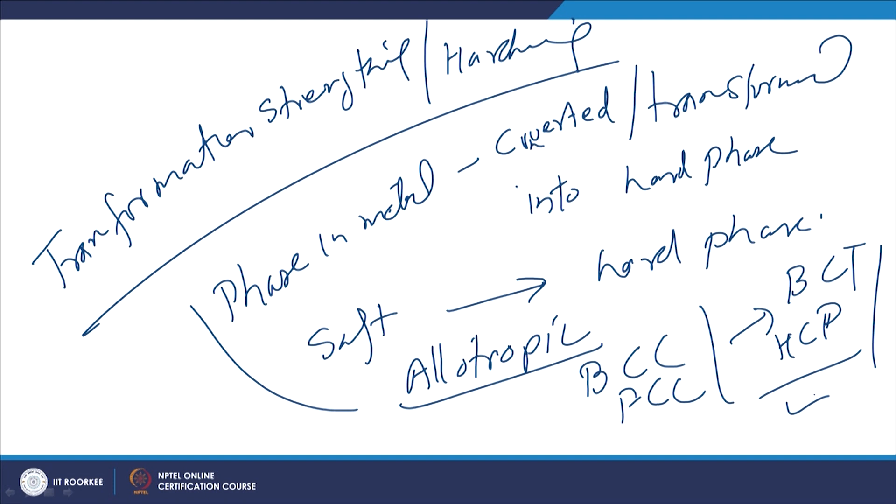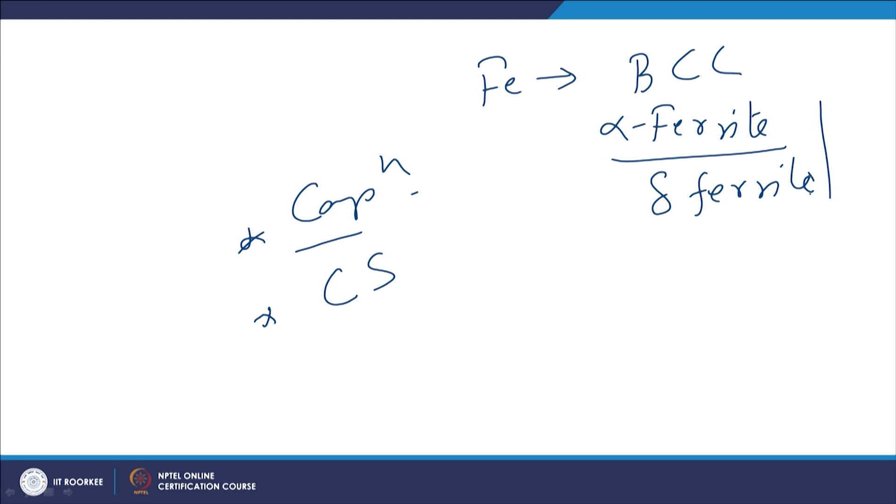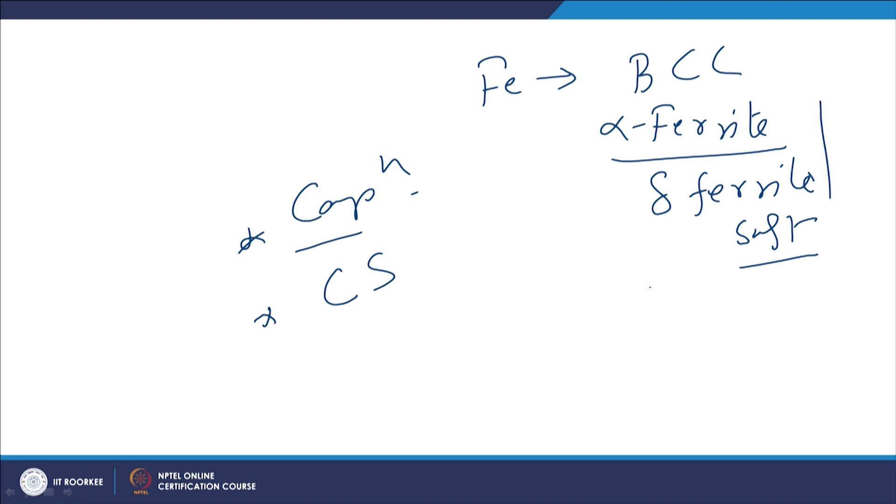So, as far as the phases are concerned, like either there is a minor change in composition or just change in the crystal structure, like iron may be present in form of the BCC structure like the alpha ferrite, or it may be in delta ferrite. So, this is alpha ferrite and the delta ferrite, both are comparatively soft. But when it is heated to the high temperature or when controlled alloying is done, iron can also be obtained in form of the FCC crystal structure, which offers altogether different type of the mechanical properties.

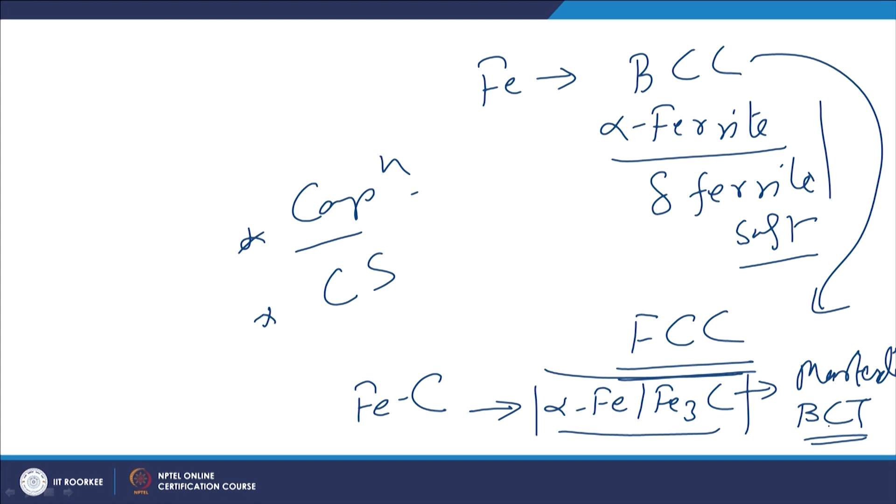Similarly, for a given composition of the iron with the carbon, we may have the alpha ferrite or iron carbide, and when such kind of the mixture is subjected in very controlled way to the phase transformation, we may get the martensite, which is comparatively harder and brittle. So, this will be having altogether different kind of the crystal structure like BCT structure. So, likewise like the iron, the cobalt and the titanium alloys also show such kind of the transformation behavior, with either change in the thermal history of the material or the mechanical history of the material during the processing.

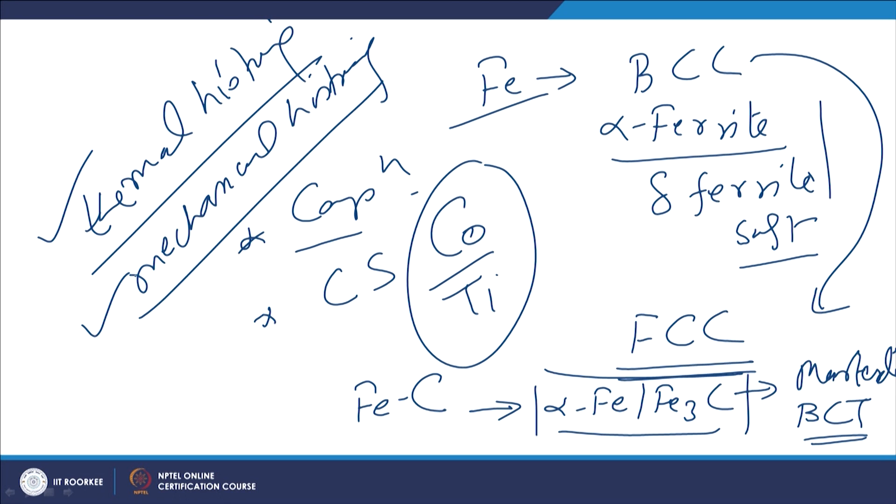So, either the controlled heating followed by cooling or the controlled plastic deformation of the metal leads to such kind of the phase transformations, where change of the phase leads to the increase in mechanical properties or decrease in mechanical properties. So, in which way the transformation hardening metals will be behaving during the welding?

We know that the welding broadly we can group under the two categories, where the fusion is realized through the application of the external heat, or very controlled plastic deformation is realized at the faying surfaces through the use of the external force. So, in both the cases responses will be different, and in that case, the plastic deformation may lead to the deformation assisted phase transformation, while in case of the fusion welding it is the heating followed by the rapid cooling that leads to the development of the variety of the phases.

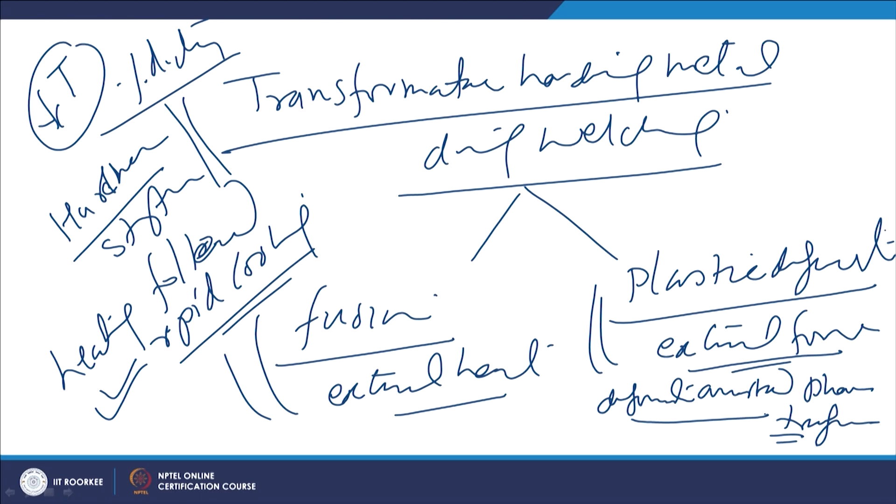These transformations and so the related mechanical property variation may be favorable, may be unfavorable. So, if it is favorable from the performance point of view, we will say that the weldability is good, and otherwise it is poor. So, now let us see the way by which we can understand the weld thermal cycle and its effect on the weld joint characteristics of the transformation hardening materials.

Transformation hardening metals. So, due to the weld thermal cycle experienced by the weld metal and the heat affected zone, there can be softening or hardening as per the condition of the metal which is being welded, which means, for example, if the steel is being welded in quenched and tempered condition, then after the fusion welding due to the weld thermal cycle in the heat affected zone, Q&T steel is over tempered and this leads to the softening, while in most of the cases due to the weld thermal cycle, higher cooling rate associated with the HAZ and the weld metal causes the hardening of the metal.

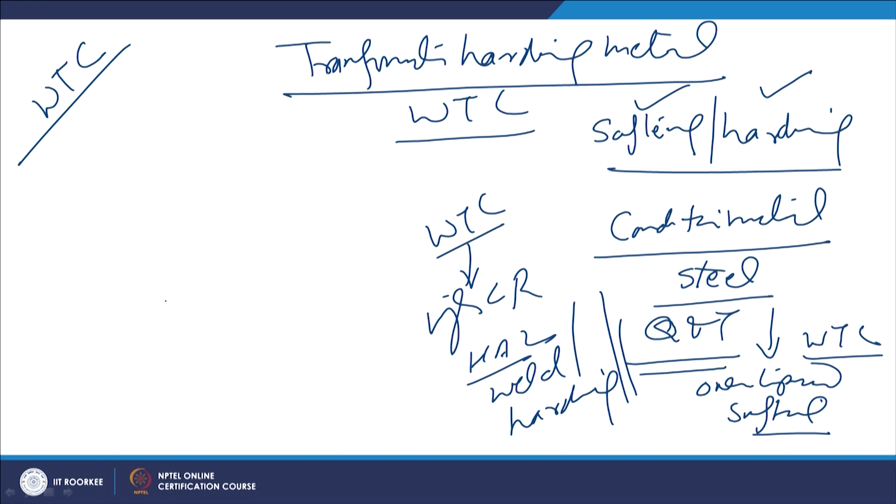So, as far as the transformation hardening metals are concerned, due to the weld thermal cycle, these can experience both hardening or softening, which will depend upon the condition, basically heat treatment condition of the metal in which the welding is being performed.

Now, we will try to see very closely the way by which the welding will be affecting the characteristics of the transformation hardening material. Say in x axis we have the time and in the y axis we have the temperature. So, if we try to understand the way by which weld thermal cycle shows the variation in temperature as a function of time, this is WTC, weld thermal cycle, very rapid increase in the temperature followed by the fast

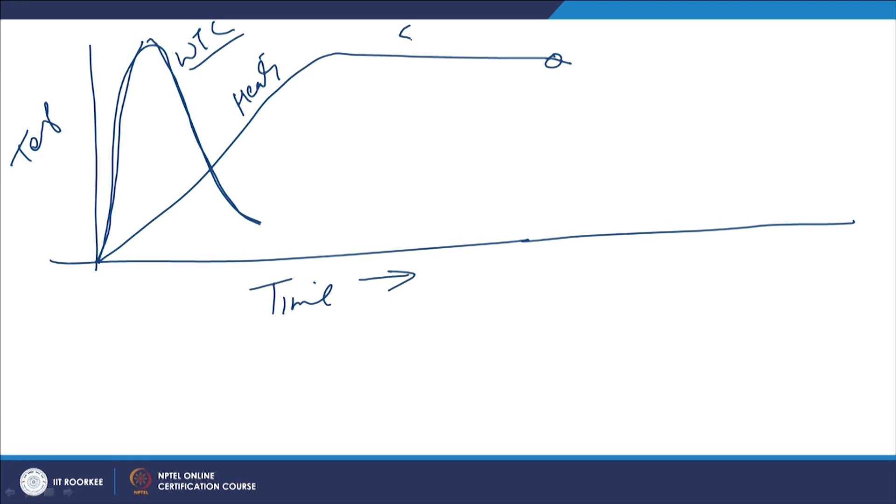cooling. So, on the other hand, if we compare it with the heat treatment, rise in temperature is slow, then holding is for longer time followed by the cooling, because what heat treatment involves? Heating then soaking, and followed by the cooling at different rates as per the requirement of the properties and phase transformation like this. So, like annealing, normalizing, air hardening or quenching.

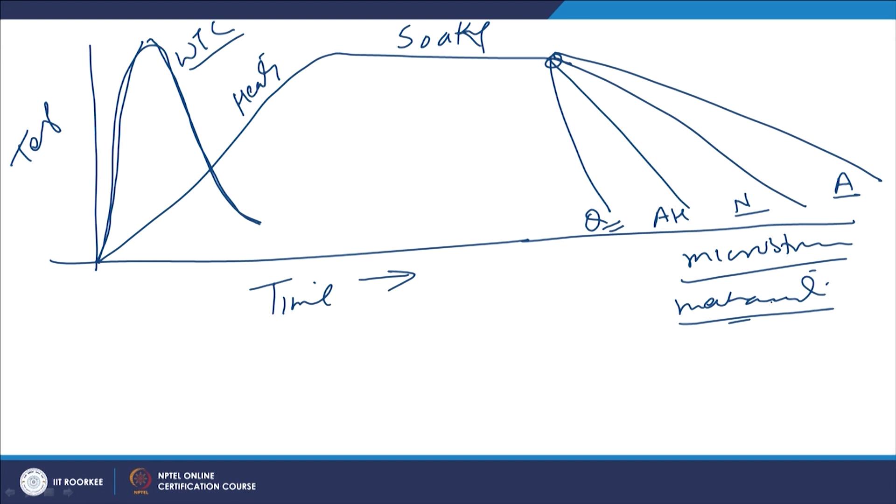So, the different cooling rates will be leading to the varying or changing microstructures and which will be leading to the different mechanical properties. This is what is typically used in case of the steel for changing or realizing the different set of the mechanical properties.

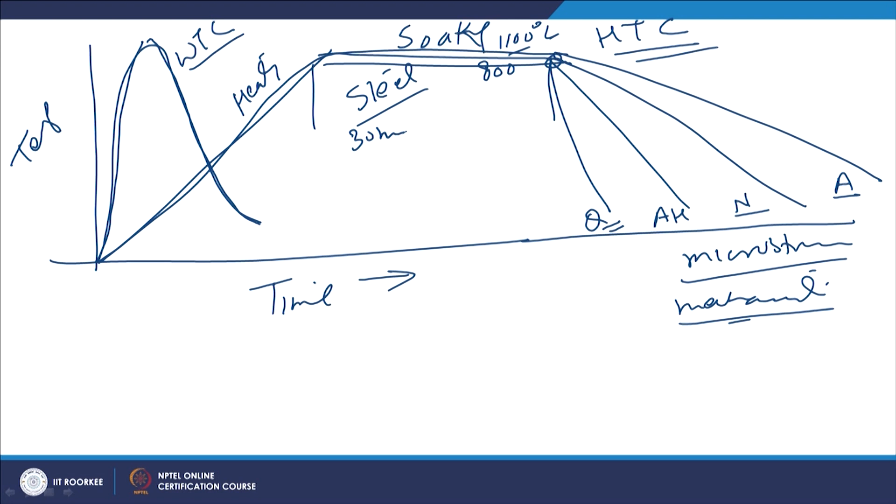So, if we compare the weld thermal cycle with the typical heat treatment cycle, then heat treatment cycle is very long, where it takes very long to heat to the required temperature, which is normally say in the range of 800 to 1100 degrees centigrade, and then followed by the soaking for longer period, which may vary as per the section size from say 30 minutes to 2 to 3 hours as per the case, and then different cooling

rates, like cooling rate varying from 2 to 5 degree centigrade per second to 100 to 200 degree centigrade per second. So, very low cooling rate, then the low cooling rate, somewhat high cooling rate, and very high cooling rates are used. So, quenching will be experiencing extremely high cooling rate; this cooling rate will be higher than the cooling rates which are imposed during the air hardening, normalizing or annealing.

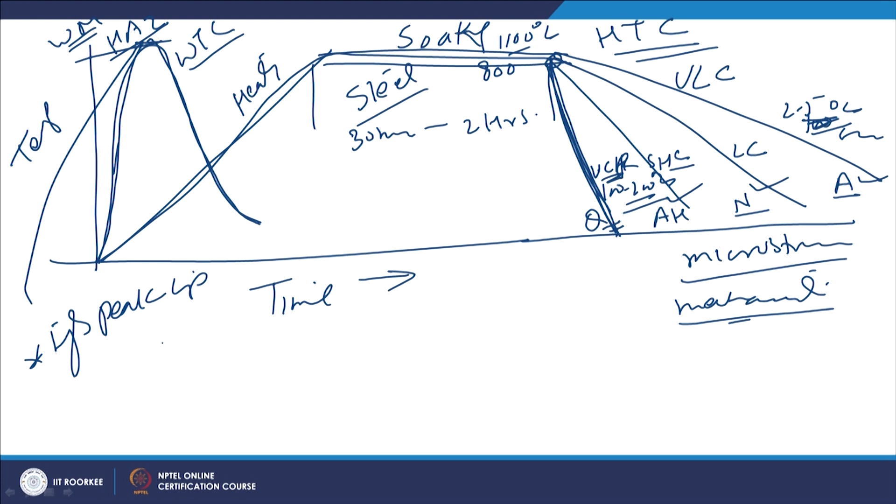So, on the other hand, weld thermal cycle, if we see weld thermal cycle of the heat affected zone or of the weld metal region, it experiences the higher peak temperature, which is of importance, like say 800 to almost up to the melting point, say in case of steel 1400 degree centigrade. So, this temperature will be changing. Next to the fusion boundary, it will be corresponding to the melting point, 1539 for typical pure iron, and the lower values for the steels.

Then in the regions away from the fusion boundary, the temperature will be decreasing, like say 700 degree centigrade, 900, 1100, 1300, 1500. So, on approaching towards the fusion boundary, the peak temperature will be high. At the same time, the another point which we have to see is the time above which high temperature is maintained. So, this high temperature retention period is very short.

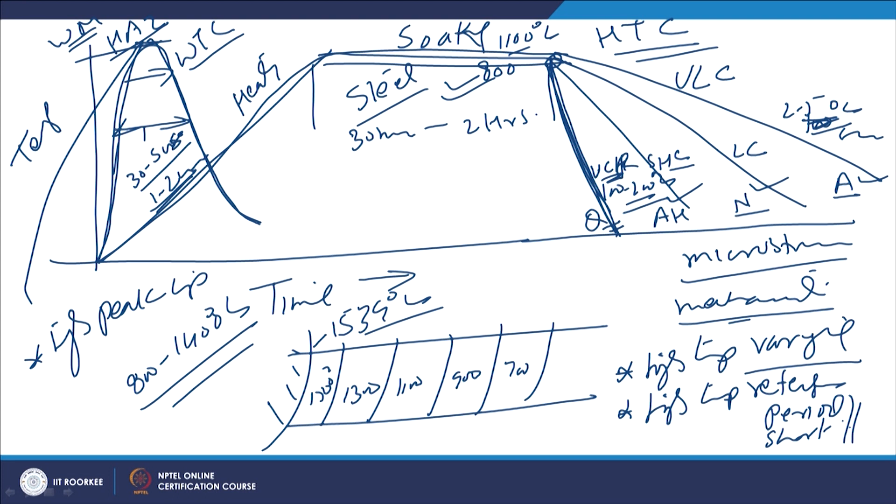This may be like 30 to 50 seconds, or as per the welding process it may be longer, like 1 to 2 minutes, but this time is not as high as which is observed in case of the typical heat treatment cycles. So, there are two aspects. One is the high temperature, which is varying from the base metal to the fusion boundary, and the high temperature retention period. This is very short as compared to that of the typical heat treatment cycle, and therefore, this has a huge implication as far as the phase transformation is concerned.

High temperature for short period, this leads to the incomplete phase transformation from soft phases to the austenite, and so whatever austenite is formed, it is inhomogeneous, like somewhere still the ferrite is present or somewhere the high carbon austenite is present. So, whatever austenite is formed, it is inhomogeneous, and this inhomogeneous austenite is subjected to the transformation at varying cooling rate.

So, if we see here, here we have the inhomogeneous austenite available for transformation, and it will be subjected to the different cooling rates as per the distance away from the fusion boundary. If the point is close to the fusion boundary, it will be experiencing higher cooling rate, and on increasing the distance away from the fusion boundary, the cooling rate will keep on decreasing because of the varying thermal cycles which are experienced by the weld metal.

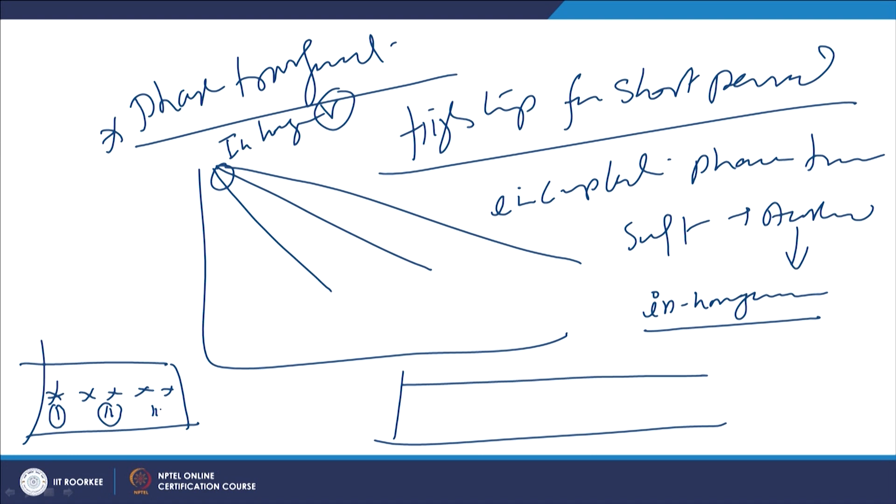If we just take the example of points 1, 2 and 3. So, the weld thermal cycle for point 1 will go like this, where very high cooling rate and a higher peak temperature is observed. On the other hand, point 2 takes longer to reach the peak temperature and then lower cooling rate, and further, lower peak temperature, longer time to reach the peak temperature, and then further lower cooling rate.

So, this slope indicates the cooling rate being experienced, and the slope during the heating indicates the heating rate, and above a particular temperature line, it will indicate how long the high temperature is being retained, for how long the temperature above that value is being retained, and that will govern the kind of homogeneity or heterogeneity existing in the austenite.

And this homogeneity of the austenite is very important for the required phase transformation as per the composition of steel, but if it is not so, then it will lead to a reduced hardening tendency or reduced phase transformation tendency into the hard phases.

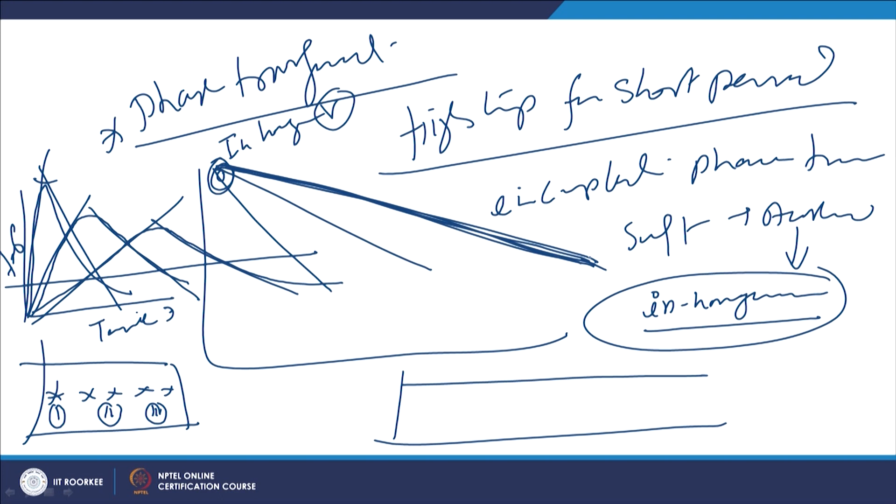So, there are two aspects: the formation of the inhomogeneous austenite, and as per the distance away from the fusion boundary, the cooling rates will be changing. The point at the largest distance away from the fusion boundary will experience a low cooling rate compared to those closer to the fusion boundary, and accordingly the austenite will transform into different phases.

Say one which is cooled very slowly will lead to the formation of coarse pearlite. One cooled at a higher rate will lead to fine pearlite. A further higher cooling rate may lead to the formation of fine pearlite and martensite. A still higher cooling rate may lead to the formation of complete martensite.

Since each phase has a different microstructure, different crystal structure, different mechanical properties are offered: the coarse pearlite will be the softest, then somewhat higher hardness, then further higher hardness, and the maximum hardness will be offered when the point is very close to the fusion boundary, experiencing the higher peak temperature, leading to complete homogeneous austenite formation, and subsequently a higher cooling rate leading to complete martensitic transformation.

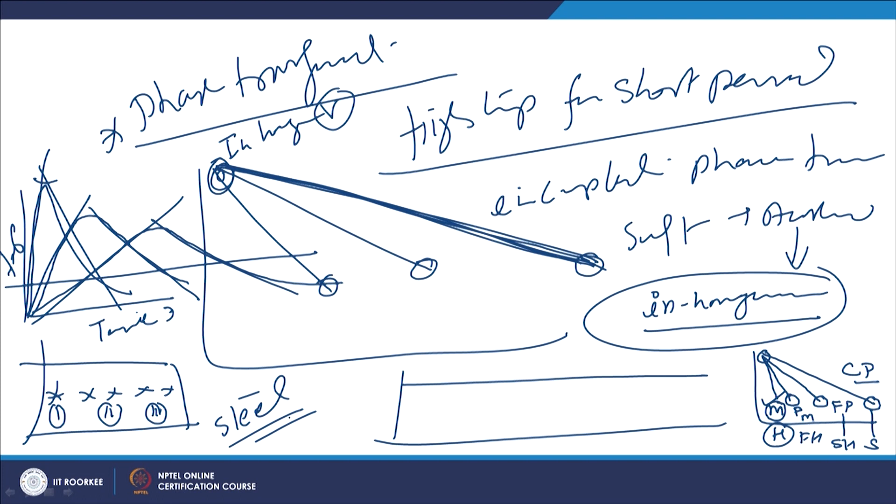So, different zones of the same steel will experience different kinds of phase transformation and accordingly properties. If we try to notice the variation in hardness in such cases, the zone next to the fusion boundary will be the hardest, and then hardness will keep on decreasing. The zone where hardness is very high will experience loss of toughness and will show a tendency for cracking and embrittlement.

So, this is the typical feature of transformation hardening steels, where high cooling rates lead to increased embrittlement, loss of toughness and high hardness. But all steels are not sensitive to this kind of phase transformation.

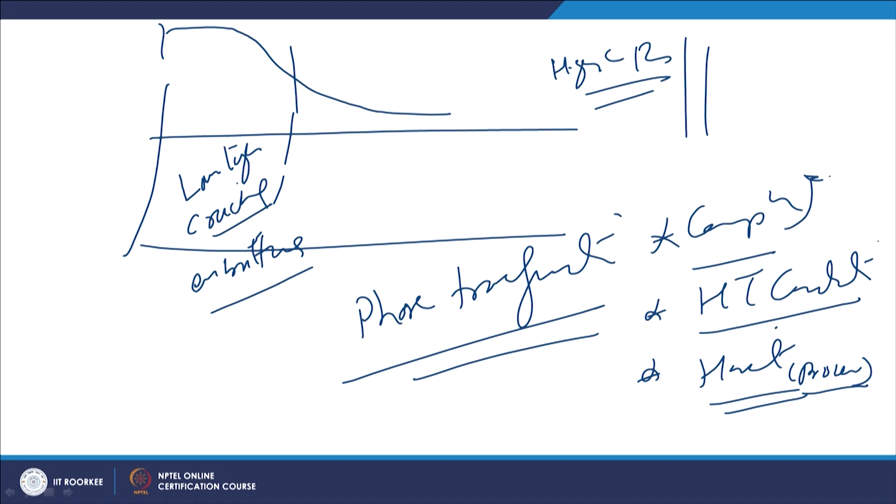The type of phase transformation to a great extent is a function of the composition, the heat treatment condition of the base metal and the net heat input. Net heat input is a function of the welding process. Heat treatment condition means whether it is in annealed, normalized or quenched and tempered condition. For composition, there are steels categorized based on composition; a few will offer higher hardenability compared to others.

So, the composition, heat treatment and heat input related aspects we will be talking about subsequently as far as the transformation hardening metals are concerned. We will try to see closely the way the weld thermal cycle affects the various phases next to the fusion boundary.

There is another aspect as far as the phase transformation hardening metals are concerned, that is deformation assisted phase transformation. So, those welding processes where a huge plastic deformation is carried out for developing the required joints.

So, in this process a lot of heat is generated, and the heat generated followed by rapid cooling again leads to the formation of hard phases in the weld zone as well as in the heat affected zone, but mostly these phase transformations are experienced in the weld metal region.

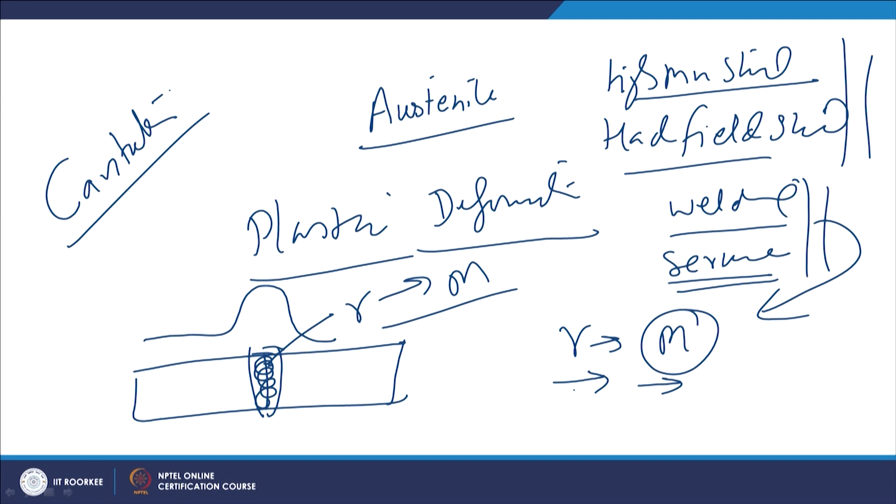Now, we will see some of the aspects of the weldability of transformation hardening metals, a typical one being steel. The factors that govern the weldability of steel include the tendency for porosity formation whenever steels are welded. Mostly low carbon steels experience this tendency.

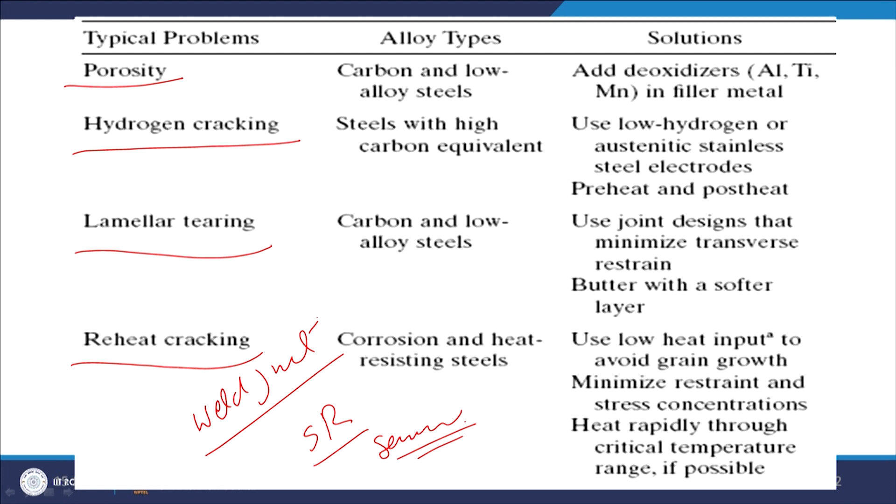Some medium carbon, high carbon and alloy steels show hydrogen embrittlement as well as lamellar tearing tendency, and some chromium molybdenum steels used for high temperature applications, as well as some alloy steels, show the tendency for reheat cracking. In this case the weld joint develops some undesirable phases, and when the joint is again subjected to higher temperature, either during stress relieving or during service, the high temperature exposure leads to cracks, which in turn reduces the weldability of the metal.

Another aspect which governs the weldability of steel is solidification cracking. Most steels have sulfur which, during welding, forms iron sulfide and increases the tendency for solidification cracking. So, the addition of manganese is used for controlling the solidification cracking tendency.

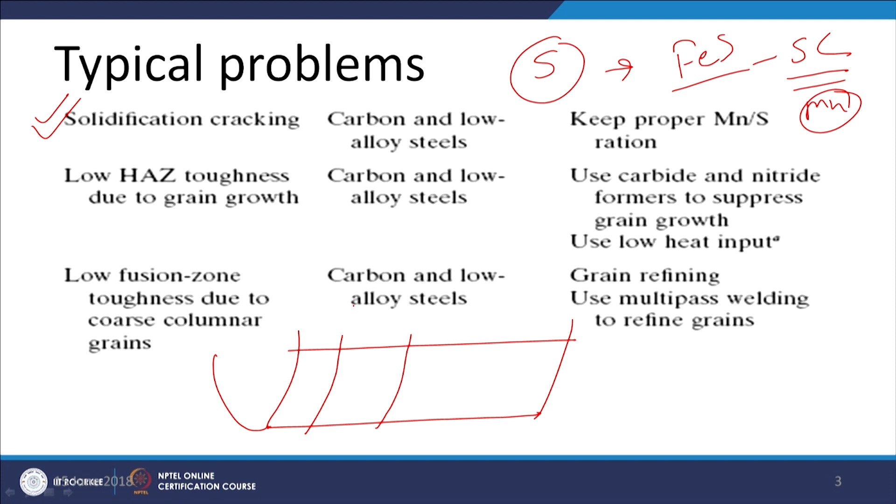As I have explained, the heat affected zone and the weld metal of transformation hardening metals like steels show the formation of coarse grained martensite, which leads to reduced toughness and increased embrittlement of the heat affected zone. So, sometimes we require post weld heat treatment to restore the toughness, or controlled alloying also helps to reduce the embrittlement or control the loss of toughness of the heat affected zone and the weld joints.

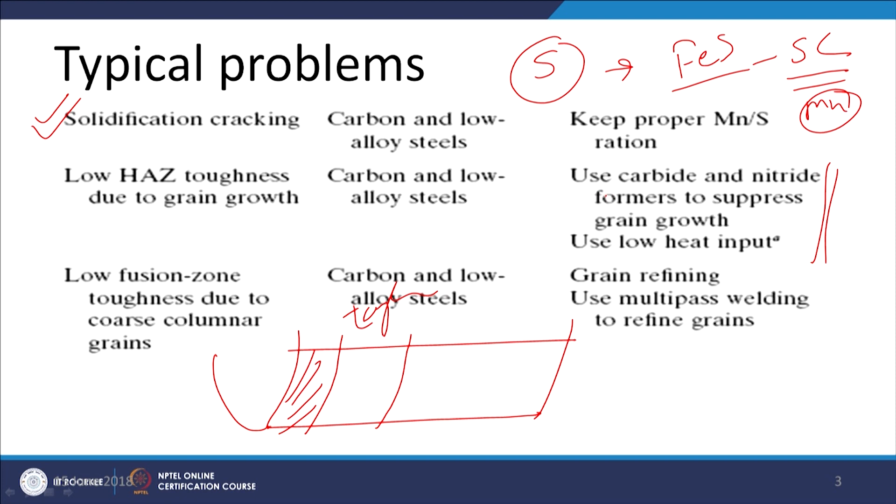Now, we will see the way the weld thermal cycle affects the microstructure of the steel next to the fusion boundary. If we take a carbon steel, when external heat is applied, a part of the metal is brought to the molten state, which forms the weld metal, and the region next to it experiences higher temperature due to heat dissipation from the weld metal. That zone forms the heat affected zone in carbon steels.

Any zone heated above 723 degrees centigrade up to the melting point falls in the heat affected zone, and all regions below 723 degrees centigrade in carbon steels, which are not heated above the lower critical temperature line, will be in the base metal zone, because they do not experience a major change in properties.

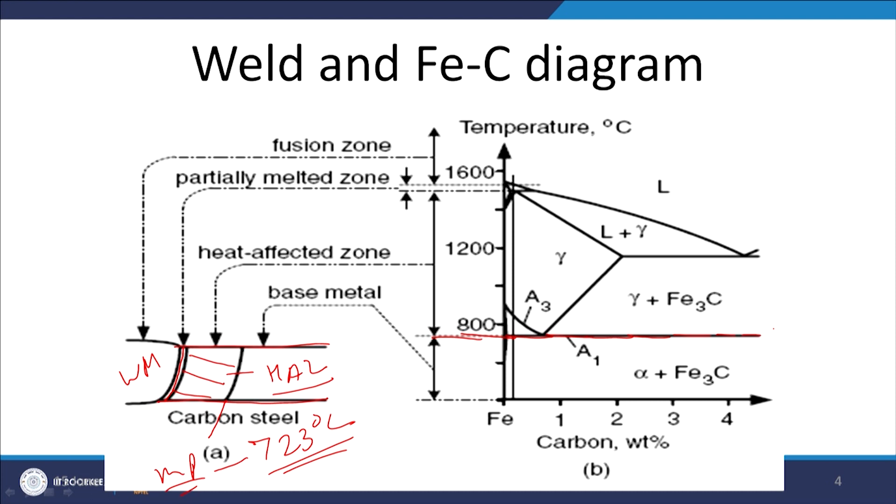The possible phase transformations taking place in the steel due to the weld thermal cycle, followed by rapid cooling which also leads to various phase transformations, I will be talking about in detail in the next presentation.

So, I will summarize this presentation. In this presentation I have talked about the way structural changes as well as property changes in the weld joints of transformation hardening metals can take place due to the weld thermal cycle and the mechanical history experienced by them during the welding process.